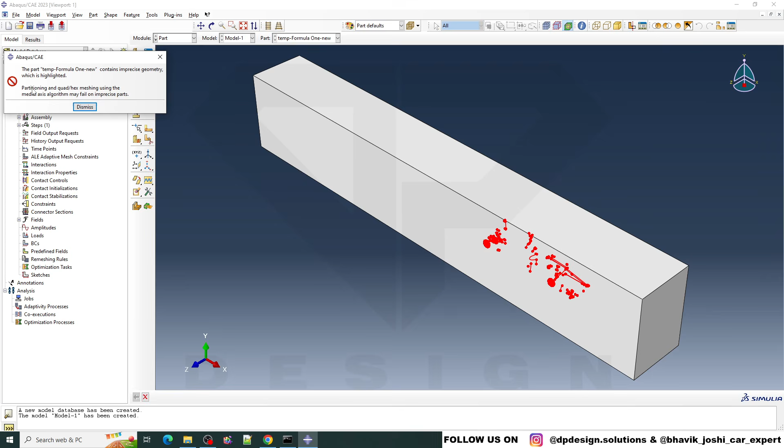So, first, how to create the part. You can import the part as well. If you have any STEP file or SAT file, you can create the part from here. Let's say I have the temp Formula 1 STEP file, let me see what I can open. As you can see, I have the SAT file for this Formula 1 model.

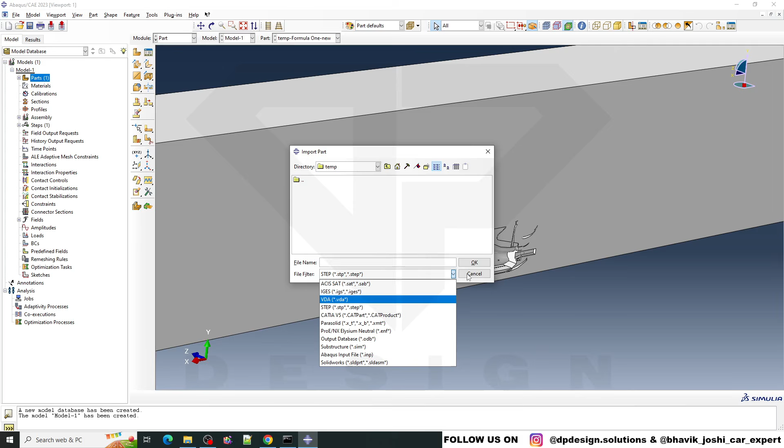So I imported the model from this portion. Whenever you are going to import, it will showcase the path and which file filter you want to use. If you've converted to a STEP file, you can select STEP and it will show the file here. It's better to use a SAT or STEP file for importing, or if you are using Nastran or other CAE software, you can directly input the INP file, which comes with the boundary conditions, and you can run straight into post processing. So these are some options for part importing.

Now I can create the part as well in this software. I'll just delete this one - I'm not normally creating parts directly in Abaqus, but I'm showcasing how to do it. You have to give the deformable part option. You can also give discrete rigid if you want to make your part rigid, and there's the Eulerian option. So solid, shell, wire, and point - I'll choose solid and extrusion. Here you will see the sketch type zone show up.

So what you can do is just draw any shape, like I'll draw a circle. You can give the dimension from here, and whatever dimension you want, like I want to give 25 for the radius, then okay. Sketch the section for the solid extrusion. Whatever operations you do, the next operation will showcase here in the panel, and updates will show. If any errors or warnings come up, you can see the warnings and errors here.

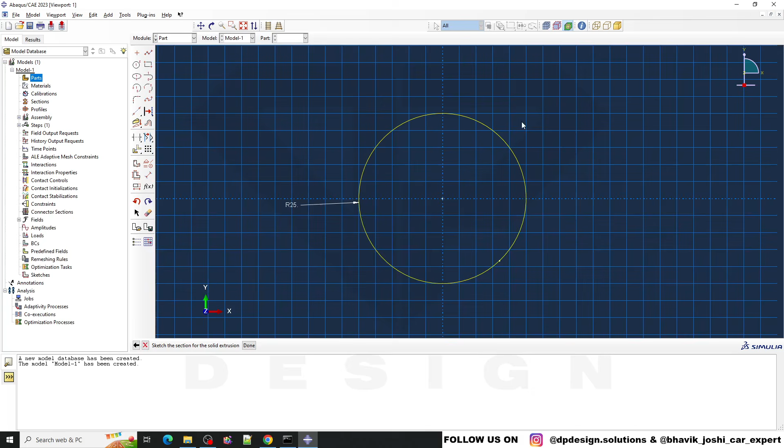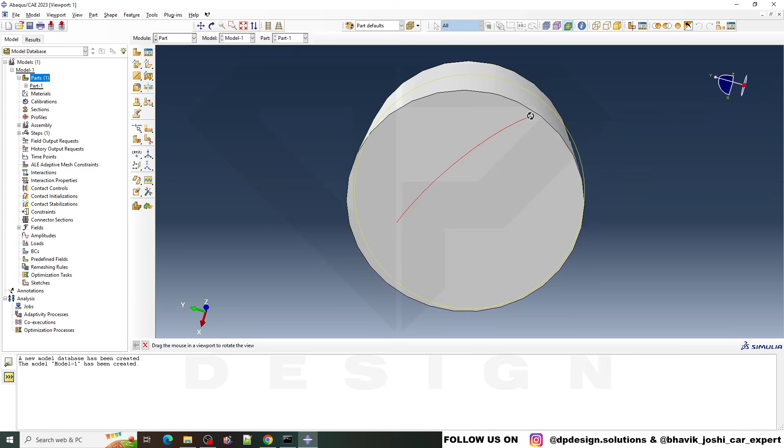Whenever you get confused and can't see an option anywhere, just go down to this panel and you can see the options. I've clicked done, and now I want to create the blind section, which has a depth of 25, and I can see my part here. So now I guess you are aware about how to create part sections in Abaqus.

If you go into these portions, there are many options for view manipulation. You can go to tools, go to options, and in options you can view manipulation. If you're a regular user of SolidWorks, you can select SolidWorks and it will arrange the pan, rotate, and zoom controls according to the software you're using. Let's say someone uses HyperView, so according to HyperView it will change the interface working style. I'll give SolidWorks since I'm a SolidWorks user for now.